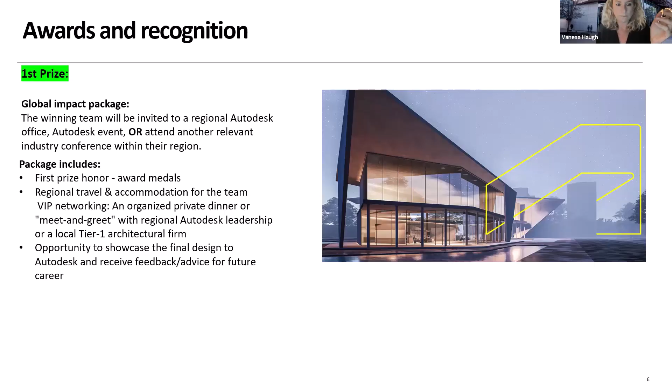In addition to this, there's an Autodesk Certified Professional Exam voucher for each of the team members, a 12-month subscription to Global eTraining platform for each of the team members, as well as a 3Dconnexion SpaceMouse Wireless, one for each of the team members, and some Autodesk merchandise. So there's quite a bit of prizes in there for the winning team. It's an exciting prize, and we're excited about this competition. As I said, it's the first time we have run this on a global level, so this particular prize comes with the value of roughly around $10,000. So it's a substantial prize.

And of course, we have an award for second place. This is an organized virtual mentorship pairing with an industry leader.

So this is the team that comes in second. They will get the opportunity to spend time with an industry expert to talk about their project, present it, and be guided in their career path. In addition, they also receive an Autodesk Certified Professional Exam voucher, a subscription to Global eTraining, and some Autodesk merchandise, approximate value $5,000.

Third prize is an Autodesk Certified exam voucher for each of the team members, a 12-month subscription to Global eTraining, and again some Autodesk merchandise.

But we're not going to stop there. We're going to have some other awards. As the entries come in and Michael and the judging team look through all the different entries, their desire is to extend the prizes out to some other good applicants. So there will be teams handpicked by the Autodesk members in the Buildathon jury, and those winning teams will get a certified professional exam voucher, again a 12-month subscription to Global eTraining, and we do have some more CAD Mouse Pro Wireless left for those. So we have a substantial first prize, second and third prize, and then some wild card awards as well.

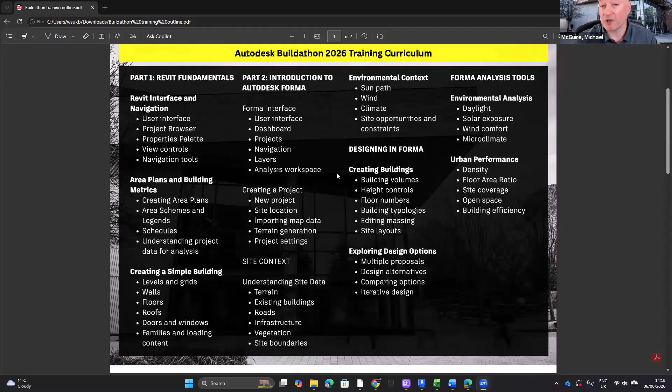Vanesa mentioned a couple of things already that we'll dwell on as we go through. Once you have a concept and an initial design and you've given it some thought, you really want to show how you're using Forma and the outcomes from Forma to influence future designs. So how might you develop or change that concept? We'll have a look at that while we work through the tasks today.

All the way through from concept 1 to a chosen concept, you want to make the job really easy for the judges, the jury panel. You want to show them that you understand the tools within Forma and within Revit, and that you're able to analyse a design, understand the output, and then use that output to say, maybe it is too noisy in this area, there is too much sunlight here, or not enough there. And here is how we adapted and changed the concept.

So maybe concept 1 becomes concept 1.1 or 1.2 - it's a minor tweak, that type of thing. And then from that you may have an entirely different concept. If there are 2, 3 or 4 of you in the team, each of you has the opportunity to come up with your own concept, and then you analyse them and determine which one of the four is the best, and whether you can tweak that even more to improve it further.

But remember what you're going to produce at the end of this - like a poster idea with images, some concepts and some analysis. You want to make the judge's job really easy, to understand what you've done and why you've done it. Okay, so here's pretty much how I was starting this concept.

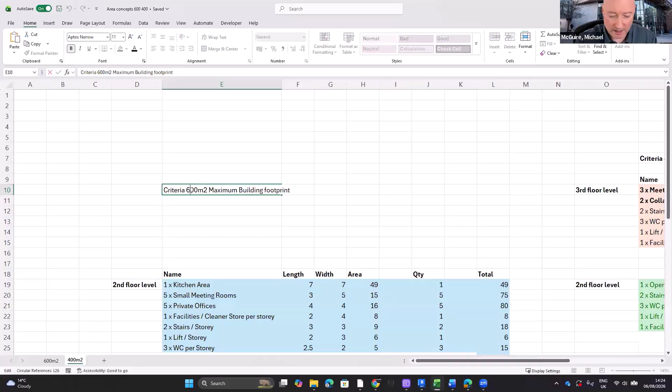So what I would recommend you do is maybe this exercise. This time, instead of 600 square meters, what happens if it's only 400 or 500 square meters, or 1,000? You can practice this multiple times.

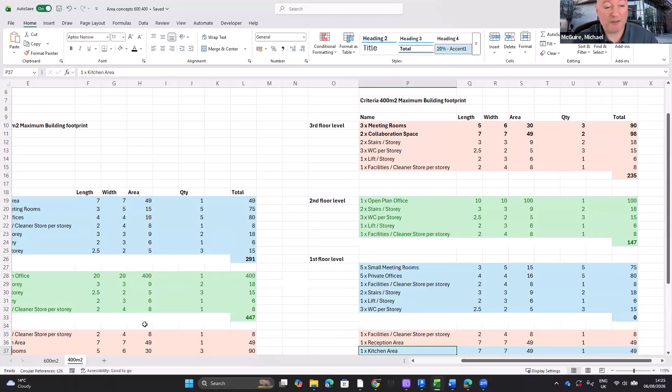This time I took what I already had existing and moved some of the spaces around. You'll notice I've ended up with a base level, then first, second, and third floors. Because I reduced the footprint to 400 square meters, I had to increase the number of floor levels to accommodate that. For example, I had to move the kitchen down from its floor level, and some rooms that were on the ground I moved to a new floor level. So that's just one way of tackling this, one way of maybe beginning or starting.

One question I've had previously: if the building footprint is 600 square meters, why don't I just make this equal 600 square meters? So this would be the next step.

Once you've got that spreadsheet, you want to start trying to sketch out. I did it here as a little sketch, sketching out each of those spaces approximately, maybe something like the right size. But we're going to need circulation space, and it might be surprising to see, but the circulation space on that floor level might be as much as 100 square meters.

So again, something you'll be told is: here's a list of all the rooms you need, here's the number of rooms you need of those—so 1 kitchen, 5 rooms, and so on—and then we'll give you the area, the largest or smallest those rooms might be. That doesn't always include circulation space. So if we also tell you circulation space needs to be a certain width, 1800 millimeters or 2400 millimeters or 2 meters, whatever it might be, we'll give you a specification of what width that needs to be. What you can't do is make any of the spaces bigger or smaller than what you're allowed in the schedule—you'll have a minimum and a maximum.

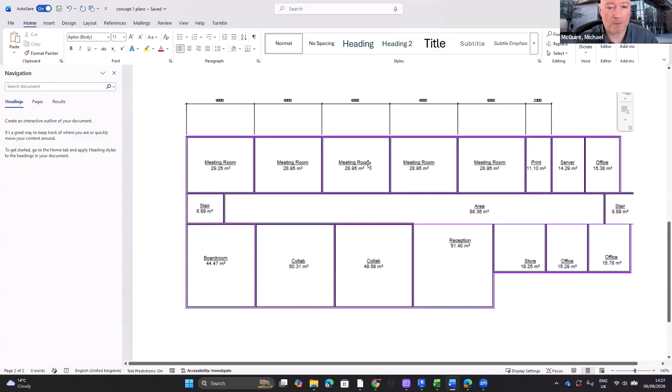And what you can't have is, imagine on the bottom right, the southeast space—if that's just an empty room, none of the spaces assigned, you can't add new spaces to the list. You need to use all the available space and no more. So if this was my original concept sketch, once I start to put the spaces together, it has to change shape because the store had a maximum size, the office has a maximum size, and so on. I got to this point using the spreadsheet and then the sketch.

The next step for me would be to go and create a little simple model within Revit. So what I thought I'd do first is show you that next step before I rewind a little bit. I'll go back a few steps to the beginning of the Revit project and recreate something like this, and since it's being recorded, you get to see those steps.

For anybody who's brand new to Revit, this might be a little boring watching how to begin and create new levels and how to draw walls and use dimensions. But ideally, if you've never used Revit before, this should give you enough knowledge and skills to recreate something like this.

Within Revit, we have the project browser here. As I said, this is one I've created previously, but let's go in and change some of the settings back—I had these little sketch lines switched on, I'll switch that back off just now.

There we go, nice neat lines. I've created the meeting spaces to the size they might need to be, the print room, the server, the office. It asked for 2 staircases, which I've tried to position at the west and east of the building—the office, stores, reception, collaboration space, boardroom, and so on.

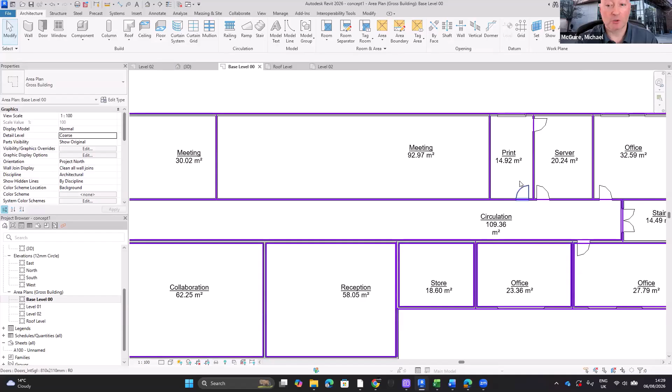Each of these spaces must be within the tolerance that's in the brief. One of the things you'll have to communicate is an area plan for every concept to the judges, and they'll check that your areas are appropriate and correct size. So here, the meeting rooms are supposed to be maximum 30 meters squared, but this one is 92 meters squared. So there's something wrong here that would need to be addressed before I could use this as a concept.

If we create the footprint of the building, if it was 600 square meters that I was allowed as a building footprint, the footprint of my building is within that 600 square meters, let's say. So we can see that as an area as well.

What we would want to do is take these images of these and the area plans, etc., along with the Forma site design analysis, and then communicate that in the best way you can to the judges.

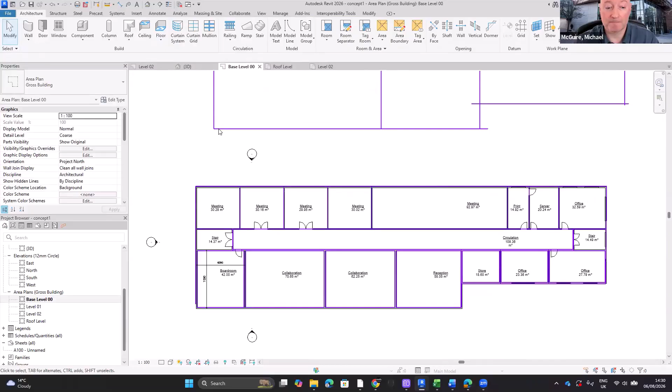Even with things like the building, if we want to think about a nice aesthetic angle, what materials are there - for me it always looks pretty good presented with just these white walls, versus, let's see, what does it look like if we pick up a different type of wall, like this one? You might think that looks more aesthetic, or you might think the other wall system looks more aesthetic. There's no right or wrong answer - you just got to make that judgment based on your team's preference.

I will close these down - I don't need to save that. And I just want to remind you that if this was the first step, I would like to now try and recreate this building.

So on the base level are all of these rooms to these sizes. I need to try and figure out a way of putting them together. So the facilities and cleaner cupboard, would that be in the reception? Where would the reception be to the building? Would the meeting rooms be near the reception? Would the print room, the IT server, the storage room and the cleaning store all be together? Is there a reason I would put them together?

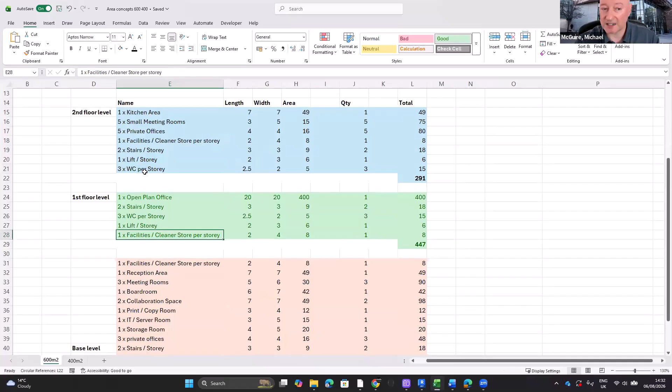Obviously, things like the stairs - the stairs are going to go through all of the stories. Do we have a staircase that goes from the ground all the way up to the second floor? Do you have a stair that goes to the first, and then a different stair that goes up to the second? So entirely your decision as a team, but remember to try and justify why that's going to happen.

So the next thing - just to show you, if I had that, I'm going to try and attempt to recreate this sketch that I had, and it ends up something like this. So if I put it like that, I'm going to move that onto a different monitor so I can copy my sketch idea.

And then we can start our Revit project. So from Revit, I'm just going to click on New, and we'll take the default architectural template and click OK.

So the first thing to note within Revit is that we have this bird's eye view, so we're looking straight down. Currently there is no building here, but this would be my north elevation, my south, east, and west. This little arrow here - if we go to the project browser and expand the elevations, there is the north view. And if we open the north view, there is nothing here to look at yet, but it would look from here in this direction. That's what that is for, that's what it's showing you.

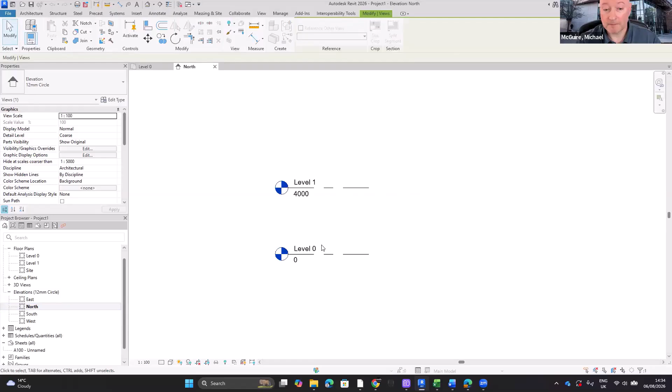If I was to open the north view, there is no building there, but we have the different levels. So I'll make this the same as what's in my spreadsheet. If I said base level, I'm going to be asked if I would like to rename these views - currently it is level 0. If I said yes, it renames this view the base level. We also have level 1 - what did we call it in the spreadsheet? First floor level, so let's try that. All I was doing was clicking on it once, it goes blue, and if I click on it again, I can edit it.

So first floor level, and then hopefully you understand now that if I said yes to this, I now have a base level and a first floor level. But if I go back to my spreadsheet, I also need a second floor level as well. So by default, Revit is only going to give me these two.

We should also notice that it is blue and white, which tells me that a corresponding view in the floor plans exists. So we have base level and first floor level. They are parametric. So if I double click this here, or double click here, then it opens that view in a bird's eye view. And to go back, I can go back to one of the other views in elevation and just double click that.

So maybe at this point you might want to discuss with your team what the different story heights are. So maybe it's 4 meters, maybe it's less. If we again just click on it, you can see it goes blue. So if I click on the 4,000, that's the part that I can edit. So if I said 3,000, then it moves the level down to 3,000. If I say 4,000, it's back to 4,000.

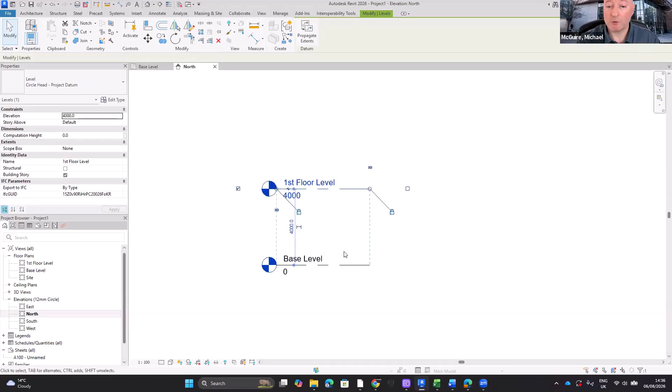So this base level, if you walk into the building, this is what you would be walking on. You imagine the floor would go down deeper than that. So this is the level you would be walking on. And if you go up through the stairs and you step into the first floor level, then again the floor and the ceiling and everything comes down here as well. So we want to think that's 4 meters. So it's not floor to ceiling height, it's floor level up to floor level.

And I need to add another here, so we would like to add the second floor level. So what you'll notice is on the ribbon we have the architecture tab. And in the architecture tab we have lots of the build tools for walls, windows, doors, etc. Floors in here, curtain systems, stairs, and so on.

We also have along here the level button. So if I click on architecture tab, datum panel, click level, the level tool is active. So it's asking and prompting that I can go and click to begin. And if I hit escape twice just to show you, my cursor is normally the Modify tool like this here. But as soon as I click on level, the Modify tool goes away and I get a little crosshair there.

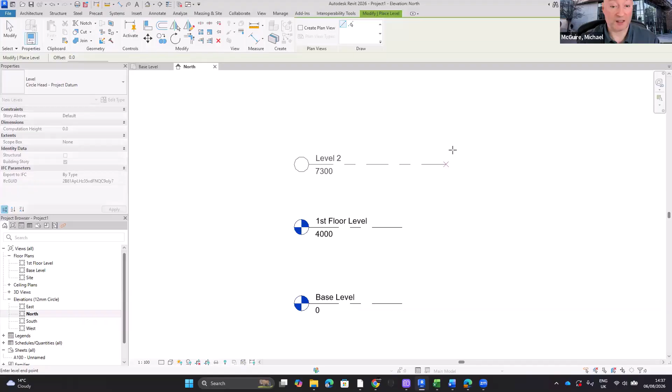So anywhere at all, if we think about it around about here, if I move my cursor, a green dashed extension appears. And what that's allowing me to do is click in this area to begin drawing the next level. And if I move to here, we can see that green dash again, and I can click to drop that or stop creating it. But something to notice with Revit, you've always got to keep an eye on the cursor - it's trying to draw more levels. So I don't want to draw any more, I only want to draw the one.

So if you press escape twice, the first escape in Revit stops drawing anything you've created, but it doesn't end the command. So the second escape is what actually ends the command. Always hit escape twice. If you want to hit it 3 or 4 times, that's also fine, just to make sure - it makes no difference if you hit it more than twice.

Hopefully you're being quite observant and you'll notice that this level is not blue and white. So again, we want to make that blue and white so that we can see it here. So anytime you create a new level, you have to go to the View tab. On the Create panel, you'll see Plan Views, and I want to create a new floor plan view.

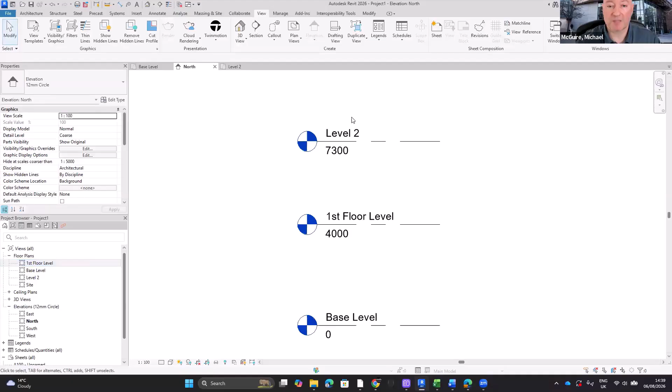And this is what pops up - it says Level 2, I'll accept that for now. And by clicking OK, we get a new level here. And if I go back to the elevation, it's now blue and white. The reason you want that blue and white is so that you can actually draw your walls, windows, doors, floors, etc. on those levels. And then finally, let's change the height - we'll say 8,000. So using the same as we did before, clicking on it once, click on it a second time.

There we go, so second floor level. Would you like to rename this corresponding view? If I said no, this here would be called second floor level, but in the project browser it would still be called level 2. So we have to say yes.

That is us set up, ready to go. So if I just do a little quick demonstration, we'll come back to this in a bit. If I go in and draw some walls just now, step by step, don't worry - there's the ground floor level, so the base level. If I go to first floor level and create some walls, I'll draw something a little bit smaller. There we would have that.

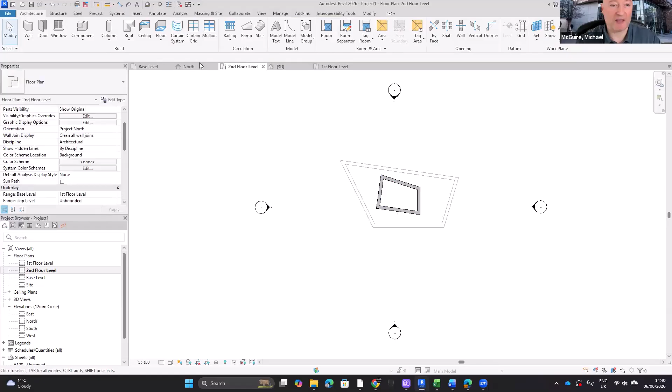And if we go to the second floor level, if we had another level, we would want to go in and switch that on. We can go in and switch it on here so that we can see it, and then we'll be able to draw our walls for the next level, if there was another one, if we needed to go to 3 stories for example. So if I take these away...

You should be able to get to that point then. So you would create your 3 levels or 4 levels or 5 levels, whatever it is that you need to do for your concept and your design.

So the next step is, if we had to go to the base level, we can then draw in or sketch those walls in a rough area where they might be sitting - think of this like a sketch. From my spreadsheet, we know all of the rooms and the approximate sizes of those rooms. And from my sketch, I know roughly where those rooms are going to sit. So something like this.

So if I want to try and recreate something like that, we don't need to draw it within here because it's going to be quite a big building, and these are just going to get slightly in the way of this. So what we can do is draw out here - it's like an infinite piece of paper, an infinite space. If we start to draw in here, we're going to end up needing to move this little elevation marker so that it sits on the outside of the building as well.

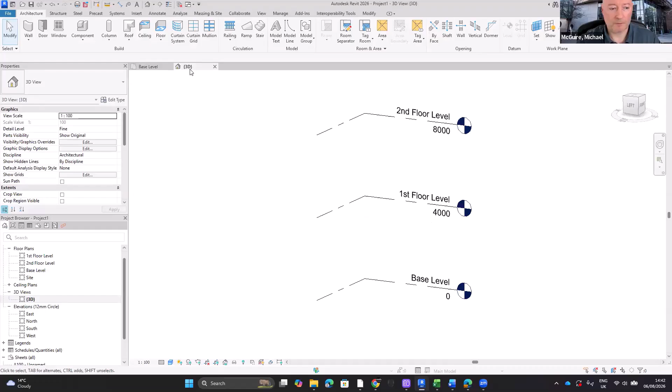If I double click 3D, then I can see the 3D view that's here. If I double click base level in the floor plan view, you can see here on the tab it's calling it the base level - it's obviously a floor plan, like a bird's eye view looking straight down, and it is the base level. So we're on the ground floor, the base level for us to begin drawing the walls, let's say.

So on the architecture tab, on the build panel, you have the option here, which is wall. If I click that tool, it activates the wall command. We can also see the cursor changed from the modify cursor, and it's now a little crosshair. You will also have here in the properties, you can go in and edit the properties of the wall, anything you're creating or anything that you select. Or here in the type selector, if you click that, you will see there are many different types of wall that you can choose to use.

Just as a little example, some of these are brick on the outside and then plasterboard on the inside, with all of the different framing materials, cavity, blockwork in between. For this, we don't need that level of detail - you're welcome to use any that you wish. Personally, I'm just going to go and use one of the little partition walls, so like an internal partition wall. So I'll just use this wall that's here.

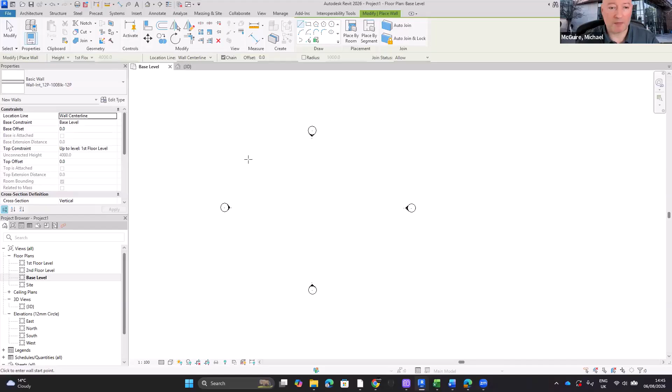I already know that maybe I want to draw for something like 20 meters or so. When you click to begin, you'll notice the wall is like a little rubber band. You can point in the direction you want to draw, and then type in the size, like 20,000 - for me this is in millimeters, so that's 20 meters, or 30 meters, or however long it's going to be. As this is going to be like a sketch, you can also just drag it out as far as you want and click to drop it there.

Let's come down so we can see - now it's asking in which direction do you want to draw. We can come down in this direction and click again, maybe here, and then go back into this direction here. You'll notice when I have my mouse directly underneath the start point, that little green dashed extension appears again, so I'm going to look for that before I click my mouse.

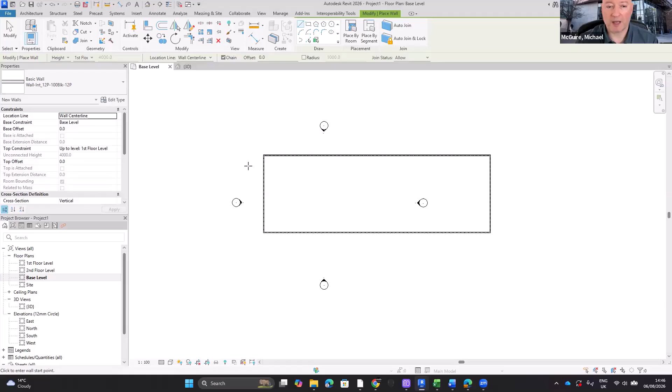To finish - a lot of the different processes in the Autodesk tools are very similar, and you'll see this when you go to FormIt as well. If you go back to point 1 and click, it closes the shape and finishes it. So a tip - we get tips and tricks as we go through. I'm going to press Escape twice, and if we go to 3D, we can check at this point that there are no problems. That's a great tip to have early on.

What you don't want to do is - I'll show you something like this. There's a problem, okay. Let me pick up the brick wall to show you - there is a problem here, this wall at the back is way too high. Ideally you want to spot that really early so you don't carry on and make lots of detail and changes and everything, and then find it later.

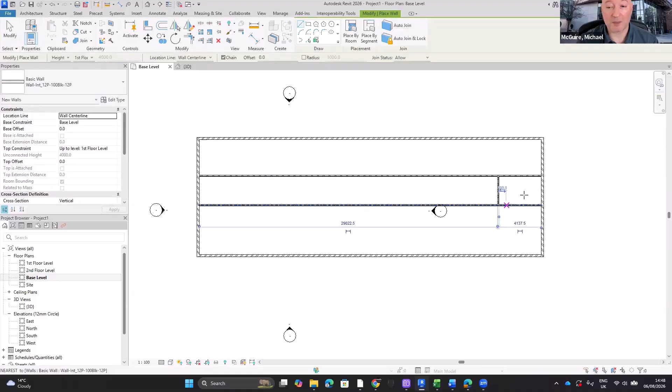I'm just going to set that back so it isn't a problem. If I go back to base level, my initial trial, then go back to wall, all I'm going to try and do is recreate the sketch. If I click to start the wall somewhere and then click to end it somewhere - I know this is circulation space in here, because of my sketch there's a staircase here and there's a staircase here, and then a series of rooms along the top. If there was a room here, how do you propose we would get into that room? We need the staircase here so we can have a door into this space.

If I just recreate these spaces - I had something like 1, 2, 3, 4, 5 meeting rooms in my sketch, then a print room, a server room, and an office. Again, how would we get into this office? Ideally, I'm just going to drag that for now because I'm kind of just sketching at this point, and I'll fix all the room sizes with dimensions before we make areas of them.

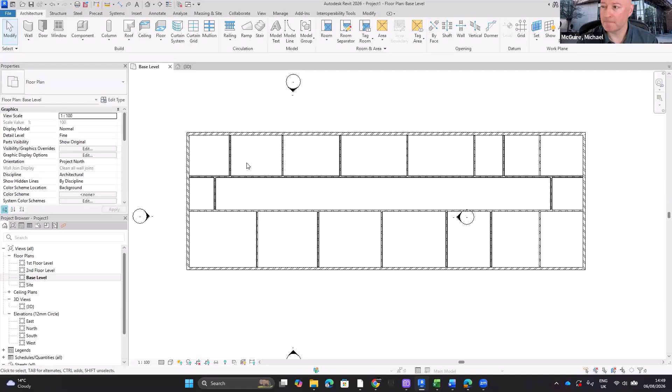I'll go back to wall - I know I had a room here that was the boardroom, then a collaboration space and another collaboration space. This was maybe going to be my reception area here, then a storeroom, an office, and another office. So as per my sketch, this is how I think this would work - I knew approximate sizes.

So once you have all of your walls in, the next step, going back to 3D, is to double check that everything looks okay - again, checking that nothing looks like that problem before. If there's no issues, as a sketch, although it's a 3D model, it's still just a rough sketch in my head - it's a concept. It looks something like this sketch that I created.

I now want to check the sizes of the rooms and make them fit. If we had a store, that store was allowed to be 8 meters. I'm thinking something like 2 by 4. There are other ways to achieve 8 meters, but I'm thinking 2 by 4 might work.

The reception is around 49 square meters. It can be smaller than that, and if you check the brief, maybe it's allowed to be as small as 40 square meters. But I'm going to try and make it as big as I can, so I'll try to get it as close to 49 as possible.

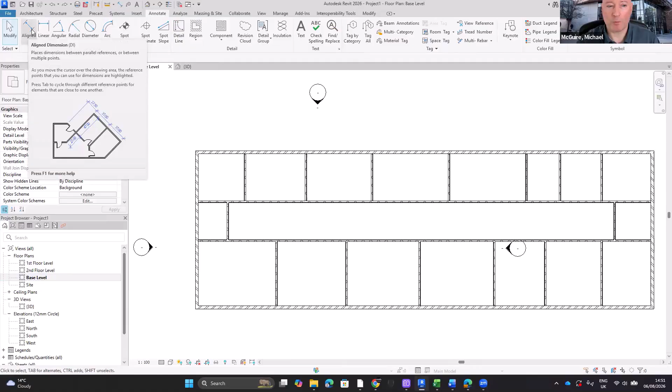What we need to do then is go up to the Annotate tab, and I'm going to use the Dimension panel with the Aligned Dimension tool. We can start to add dimensions, and there are different ways to do it. You'll notice there's a dimension that goes from the center of the wall to the center of the wall. We're not going to be super critical about this - if these are the area sizes and it's to the middle of the wall, that will be allowed. There are other ways to do it where you can dimension to the wall face.

So if we add it to the wall face, we could do that as well. If it was me tackling this, thinking of it like the Buildathon, I'm going to try and go from the middle of the wall to the middle of the wall. You can see that approximate size - that was one of the meeting rooms. I think the meeting rooms should be around 5 meters by 6 meters, so that's quite small at this point.

While you add the dimensions, this is why I would maybe try middle to middle. Notice if I click for my first click and then my second click is the first wall and the second wall, I can then click a third time to drop the dimension. Or I can continue clicking and it will select the next wall and the next wall and the next wall. Then if I click here in this space, it drops all the dimensions at once.

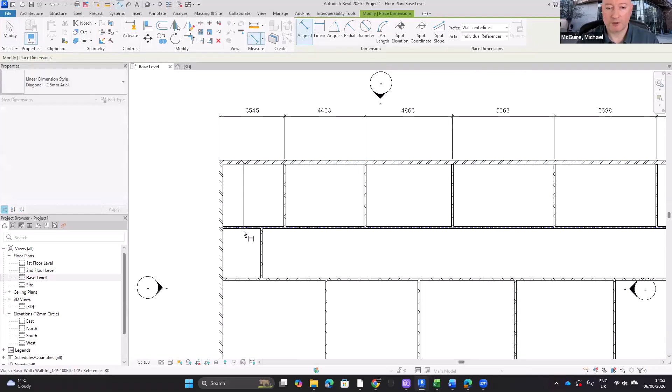So there's those dimensions. If I did it the other way as well, just to remind you, we'll do Aligned Dimension from the center of this wall to this wall here, then select the next wall and the next one again. Then if I click the mouse, it drops the dimension, and then escape twice just to drop that tool.

As an educator, I'd say the number one thing that catches a lot of students out is changing these dimensions. If you want that to say 5 meters, this is 9 times out of 10 - I'll show you what students do wrong first. They will double click that value and this pops up. This is the wrong way to do it.

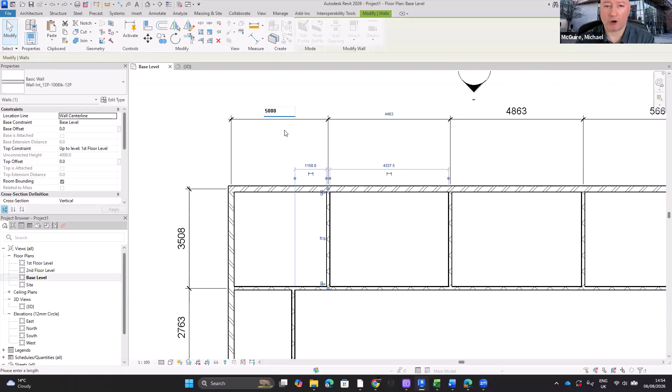What Revit is asking you is, what do you want to move in order to change that dimension? We can move two things - these two walls. After hitting escape twice, I have the modify tool active, you see that with the cursor. If I click this wall, the dimension here turns blue, meaning it's editable. So if I say 5,000 and press return, that space is now 5,000 - between the center of this wall and the center of this wall.

Okay, we'll do the next one. Be careful - you'll notice it's 3508, but when I select it, a little temporary dimension pops up that's measuring from face to face. That's not what I want. I want to change this one up here. So 5,000. Then I'm going to work my way along from this wall, doing each in turn all the way along. 5,000, and then the next one, again this dimension, 5,000. So we have 1, 2, 3, 4. I have one more to do. 1, 2, 3, 4, yep, 5 meeting rooms.

These other spaces, we're going to do exactly the same thing, but now we have the print room. The print room was something like 3 meters, so if I click this wall here, I can change the dimension at the top to 3000.

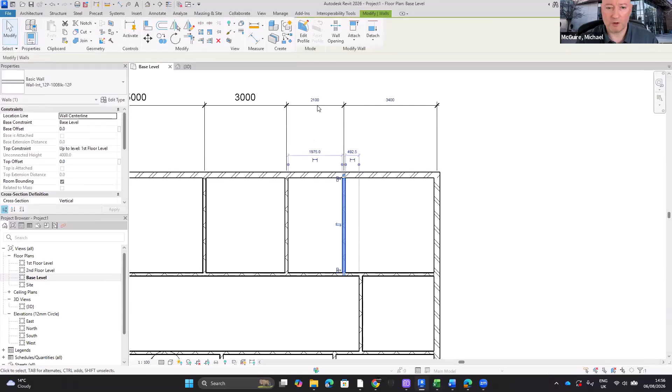The next one is the server and then the office. What I might find is when I make the size the server, it might end up being too big, so we'll see how that works. What size should the server be? Oh, 3 meters as well. So if we click this wall and make that dimension 3 meters, there we go. That means for this office space, this is the last wall to move.

So we had storage room, 5 meeting rooms, 2 here, whatever it might be. Let's say it's meant to be 5 meters. So if I take that from the brief, we now have 5, 5, 5, 5, 5, 3, 3, 5 meters. So we have all the rooms the correct length.

What we need to work out now is what the width of these spaces should be. Those meeting rooms should be 5 by 6. So I've got 5 meters, and this distance here needs to be 6 meters. Do you see what happened to the corridor? It made the corridor only 270 millimeters.

So we need to change the next wall. Maybe we're told it's 1800, whatever it might be on the brief, 1800 or 2400 or whatever it needs to be. So these rooms here have all started to become the correct area.

So we've got these hopefully now the right size, 5 meters by 6 meters, and that should tie in with what we've got for these rooms here. I've only got 3 here, but let's say we were asking for 5. I think in my initial brief I changed it myself to 5. Now we've got the 5 of them plus a print room and so on.

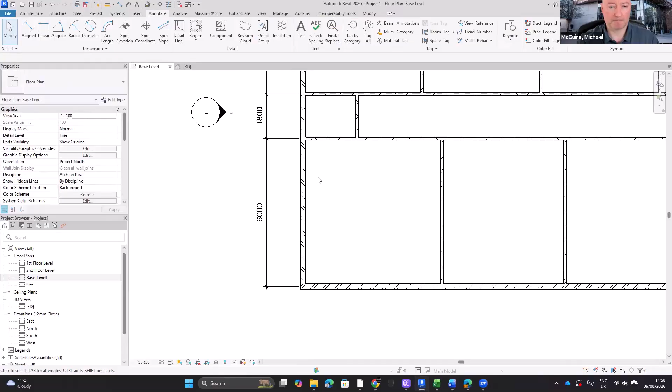I can't use the little temporary dimensions because they go to the walls that are here, to the face, and to the ones in between. I need to know the width of the room. So I'll go back to the same dimension tool: annotate, dimension, aligned. I'll pick up from the middle to the middle and carry on all the way along to the middle of each of these spaces, then click to drop that dimension. Then we do exactly the same thing I did before.

I'm now going to work my way along, starting with this wall. We said the boardroom should be 6 meters by 7 meters, so this dimension here should be 7,000. So this is now the boardroom here.

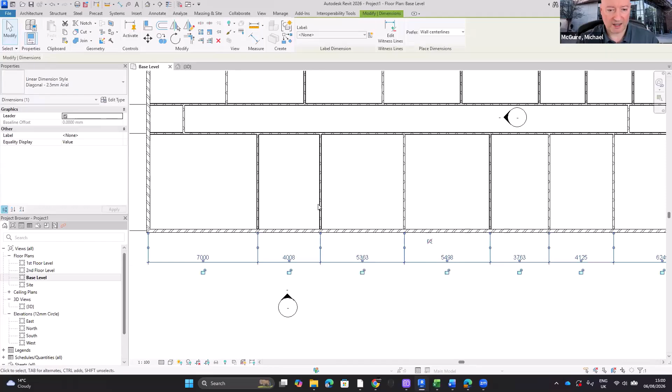Then there's a collaboration space and another collaboration space, and then the reception. The collaboration space should be 7 by 7. Well, I've got 6 meters deep, so let's try 7 just now. It's slightly small, and then again this one is 7. We could do 7.5, so maybe 7,500 if we wanted more space for it. Then we're just working along.

So if this wall is in the correct place, and this wall is in the correct place - here's the number 2 thing that a lot of students get wrong in Revit. The first one was changing these. The second most common mistake I see students make is if they want to change this size here.

So we want this to be a reception, for example. I'm going to move these out of the way so they're not interfering and we can see. But I want to move this wall to make this space the size of the reception - reception is 7 meters by 7 meters. Again, this is only 6,000 deep, so maybe we want something like 7 or 7.5. What a lot of students do by mistake is they click this wall - so let's make it 7,500.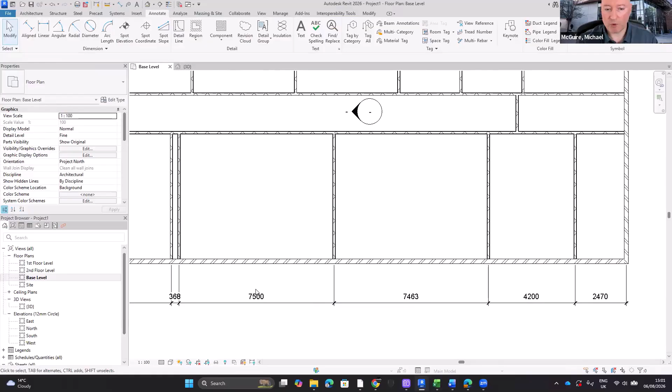And you see that wall moved and it is 7,500. But what that did was it changed the size of the room that we already had, the collaboration space. So this room here is correct. So if I move this wall that way, it changes that room.

So I'm going to click this one and make it 7,000 again. So there's my reception area, and then the next room is going to be a storeroom, whatever that might need to be for size. So we had, which one was it? Even if it's a plant room, 5 by 8, staircases, we'll check the size of them. So a cleaner store, or whatever it might be.

Let's say it's meant to only be 2,400, but it's way too deep. So what we might have to do, and we'll see this throughout our design, is if this is too deep and these rooms here have to be narrower, not as deep. We can't use more space than the brief says we're allowed to. So if this space is going to be too big, then we need to change the shape of it.

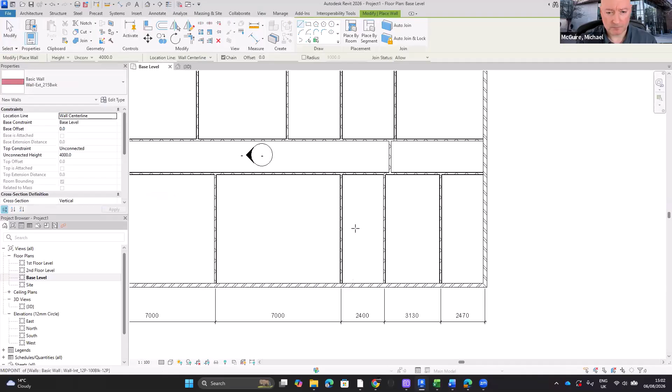So again, I'll just use wall. You can continue using the same wall type that you already used. And I'll just draw along here. And it means this is correct as a space, but we don't actually want these ones.

So what you'll find is you can click on these walls and just change the length of them. If I click on the wall, the little blue dot that's there, and if I click on that wall, that little blue dot, and do the same with this one, I have a little bit of wall that I need to add in here.

Okay, so then these end up being the size that they need to be, but look what that's done to my building—the building shape has changed.

Finally, the next step within here, if you think that's correct, is to prove that you've used all of the areas and you haven't increased any of these sizes.

So how you do that within Revit is, if we look on the Architecture tab, on the Room and Area panel, the first time you run this, if you drop down the Area button, you have the area plan available, but you'll notice that the area tool is grayed out—it's currently not available. So we'll click Area Plan.

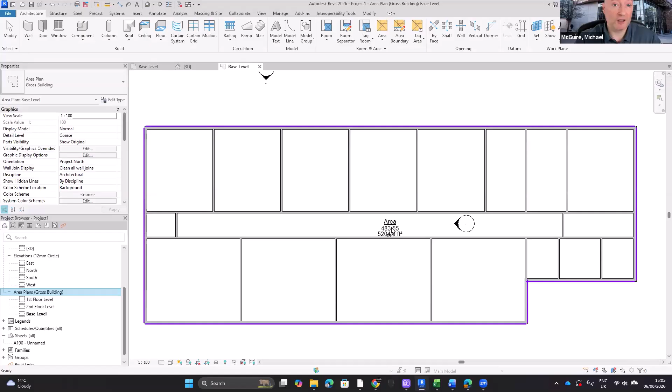So that's good if we have a 500 square meter building footprint maximum. If your limit is 400, then it's too big—450 is too big, 500, yep, that works fine. So the building footprint currently is 483.5 square meters.

If you want to work in square meters or square feet, you can select that little piece of text, and up here you can determine which one you want to use. For me, it's just square meters, so I'll use that.

Each of these rooms, I would like to put an area or a space in it to tell me the size. Now, if I tried to do that just now, you'll find that is all one area. What I need to do is use all of these to divide the areas, so we need to tell Revit that these are walls and they're going to divide each of the areas.

On the Architecture tab, Room and Area panel, you'll notice there is a tool called Room Separator and then Area Boundary. At this point, we want to use Area Boundary. If I click that, it's set up to pick something. Now you can draw these in—you could draw a little rectangle, or a circle, if you've got a room that's a circle. But it's set up currently.

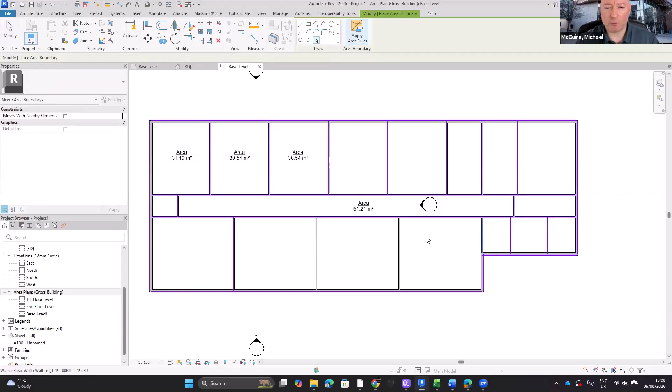So the process is area boundary, click each of the walls. You want to make sure you pick each of the walls only once. There we go, so all of the external and all of the internal have been selected. And then we pick area, and as we go, you'll notice it's filling a colour into each of the area, so you know if you miss one.

So let's say, for example, I wanted to do this, and I wasn't going to use this space for any area. Then in my concept, I need to change the exterior wall because I can't have an empty area or an empty space. I can't have any space that's not used.

Okay, so we've got now all of the footprint, everything's all covered, so we have those areas. And it's 31 square meters, or it's measuring to the outside of the wall. We could draw that in and bring in more detail, but that will be absolutely fine. So we've got all of these spaces now at approximately 30 meters for each of the rooms.

I want to now change what it's called. Okay, so again, like the elevation, if you click once on it and then you click again, I'm going to call this one meeting room. And then the same again here, I'm just going to use copy and paste, so all of the meeting rooms then are called meeting room.

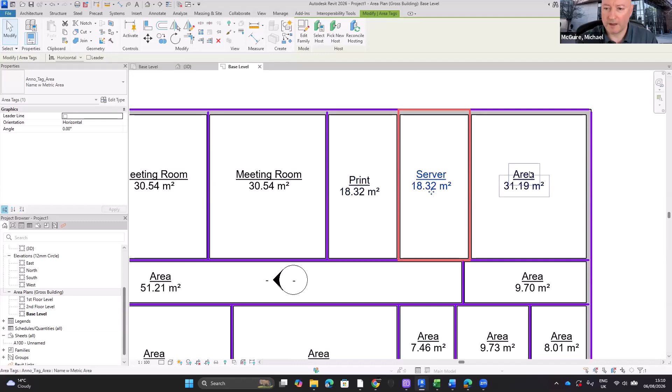That's not meeting room, that should be the print room. And then this should be the server. And then this one here was an office. And again, I want to pay attention down here at some point to how you get into that. And maybe this wall should have been moved further over.

And we can see what happens when I move the wall. It's changing the area. How is the area of that in comparison to the spreadsheet? Is it too much? Is it too small? Okay, and then just paying attention to each of these areas and these space sizes, so meters squared, square foot, whatever it might be. If you get to this point and you have to move some of the walls because the areas are too big, that's why you're achieving this, that's why you're doing this step.

Okay, so if this wall here needs to move to the left, you can go back to your base level view and you can change these dimensions. Okay, so if we said 4,500, and if I go back to the base level on the area plan, you'll see everything moved and everything changed in size.

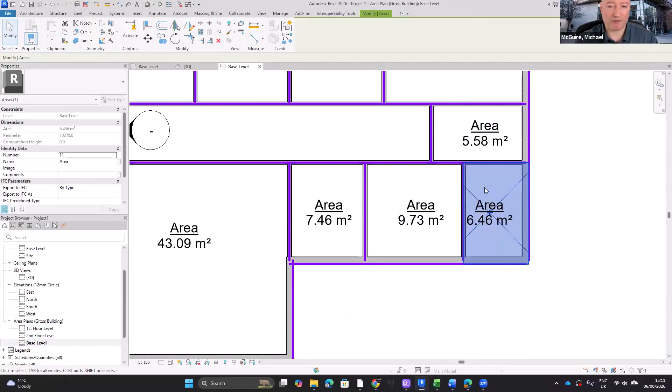Okay, oh, I do notice something. How would I get in this space? Okay, so I have to go in the stairs to get in, or do I access through here? Maybe I go into the office to then access this office. Maybe does it work if the wall is over here? Not enough. Okay, so one thing to think on when you get to this step is what your fine tweaks might be. What rooms do you need to change, for example?

One of the things that I ended up doing with my concept, if this is the boardroom, this one here is a collaboration space, like a big open plan collaboration space. I should have copied and pasted. And then this is the reception, okay? One of the things we could do is we could utilize this space here.

So we've got something like 50 square meters. If we made that wider and it was 2,400 millimeters, maybe it would end up closer to almost 100 square meters of space. If you're trying to reduce unused space, then maybe you want to bring the reception area up into here as well, so it's not all just this space here.

Okay, and again, just checking in 3D that looks okay.

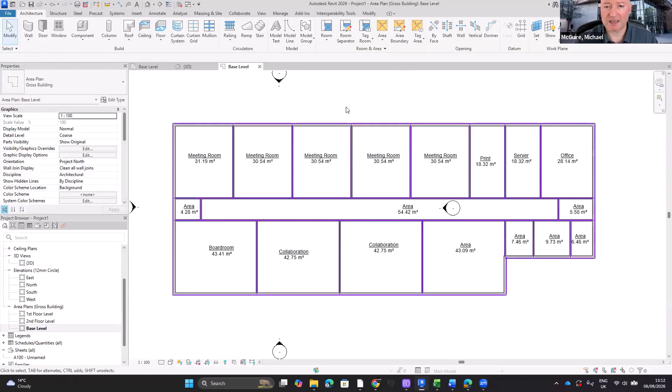Finally, the last thing to do in the area plan for this level is look at the Annotate tab. In the Colour Fill panel, there's a tool called the Colour Fill Legend. If I click that and drop it, it asks what scheme you want. Is this the area, the gross building? You can just accept that.

So currently it's showing you a legend by the type of the area. What you can do is click on it, and when you click something in Revit, the Modify panel appears. So we can click Edit Scheme.

Rather than by type, we want to divide it and show it by room name, or area name. This is just a default, it's saying I'm going to set all the colors for you. If you say okay to that, and okay again, you get all of the colors appearing for you.

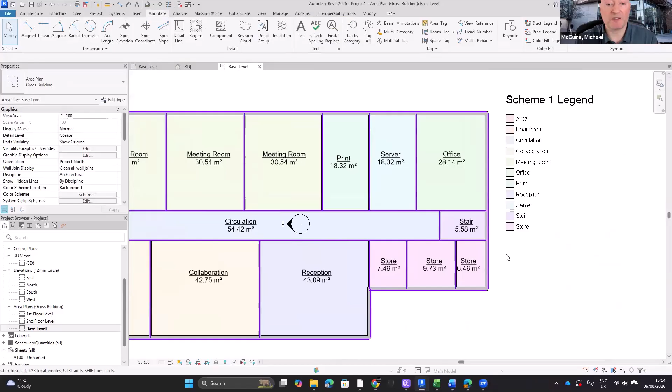So we can see right now we've got area a lot. If I say circulation, it adds circulation into here. This one here should be reception. Nothing should be called area, right? So if we said this is stair, maybe this is stair 1, stair 2. There's a store and another store and an office or another store, whatever it might be from my brief and schedule that's there. So you've got one more that's called area.

This works really well in that you can screen print this. So if we take a screen print of this area here, we can use that on our poster to show where we initially thought the reception would go.

Possibly that happened because there's a road here. If there's a road here and it's very noisy, is the meeting room in a good position? What about the boardroom? It's going to get a lot of sun in the afternoon and evening. The reception, where is the car park? Where's the main road? What is the entrance to it? Why did you think the reception would be good here? What about putting the staircases at both ends? Why did you think that was a good idea to do that?

One thing that's a little warning: when we look at the ground floor, we've pretty much used up like 500 square meters or so, almost 500 of a 600 square meter footprint, for example. So we've used up as much as we can. The next level up is going to be smaller than that, and the next one up is even smaller. How is that going to affect where your staircases go?

So if your building is getting smaller as it goes up, is it getting smaller like this? It's only using up, let's open up here, the base level. So is it only going to utilize these spaces here? In which case, how do you then get 2 staircases on each level?

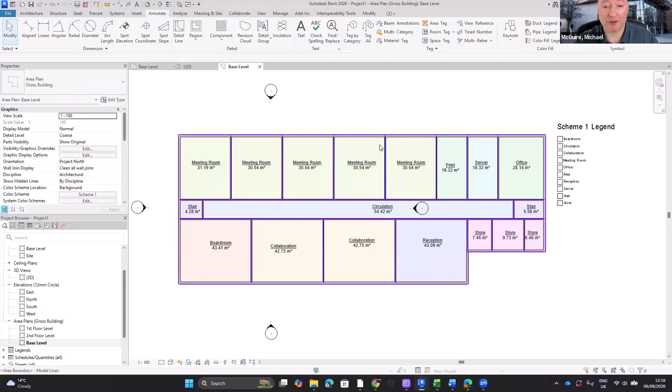Okay, so you might then think of a different concept. I need to put a staircase maybe here. So maybe a staircase goes here, and on the ground floor the meeting room goes here, and I have my second staircase in this area here. So on the next level up, it's just a repetition of exactly what we've done. So this is the base level.

To do the same thing on the first floor level, you just repeat all the steps. You open the first floor level, go to the wall tool, choose the wall you want, and begin drawing those walls in. So if you think, I will try and make it a little bit smaller this time.

So if I know that in my concept... I've just roughly done that, but in my concept, if the upper level is less square meters, hopefully you can see there's an issue. If this was the staircase, it goes to the roof, right? It goes nowhere. So that won't work if we want to do that. Okay, so maybe we think about in the concept putting the staircase here. And then in the next level up, if I was doing like a 3-story building, it's even smaller again.

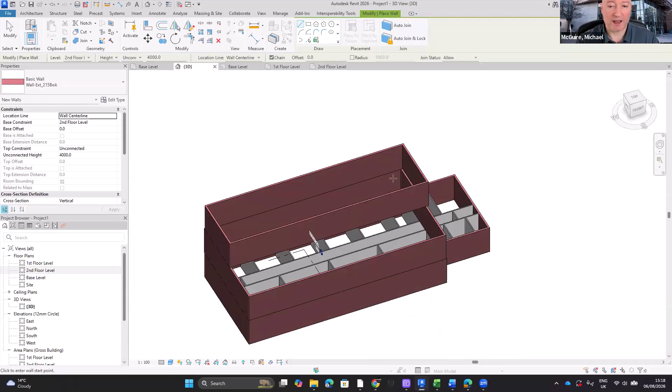Okay, that's why I'm thinking maybe that corner's a good place for the staircase to go. So if we're repeating the same things again, we've got all the internal walls to put in, then the areas to put in. We then have that upper level in that corner. Not only the stairs, but can you also remember what else we want to stack? Any wet rooms or bathrooms?

So where were the bathrooms going? Okay, so if we think about that here, maybe I was putting the bathrooms here, right? One here and maybe one over this side, or wherever it might go. If we put a bathroom here, do we put the bathrooms here? So they're all together, so they're near the reception. But if my building then gets smaller...

And the bathrooms were here, how does that work then? Where do the bathrooms go now? So if we put the bathrooms here, then where does the staircase go? So do think about that vertical articulation, how you're going to move between the different levels.

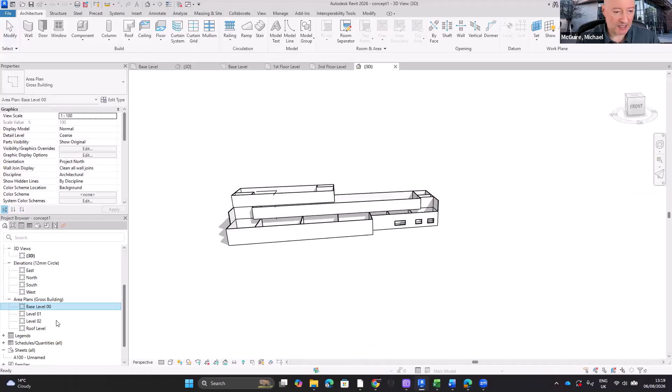Okay? So that's the plan. Ideally, what you would have then is, if we go to that little concept that was there, it's quite similar. You'll notice it's very similar in what's being created. So we can say there's the base level. Okay, there's what that looks like. We go to level 1, then we would repeat that for level 1.

Maybe there's a big open plan. What did we have? An open plan 400 square meters office, plus 2 staircases, 3 WC, the lift and a store. Okay, so we start to put areas in here as well. So we think about the area boundary and what we need to add in there. So for area, we've put in 3 WC and a store and 2 staircases, a lift, whatever that might be.

Okay, and then carry that on upstairs. So you will end up with 3 different stories, or 4 stories, or 2, however it works for your brief. And each of the plans will have all of the different areas. Here we go, showing all the rooms have been used and showing that they're not bigger than the brief facilitates. Okay, so I would say that's a good point to pause.

I would ask at this point if anybody has any questions. This might be a good point to ask them. I do see Q&A. There is, Michael.

Yes, I think I might reply to one from Kevin, and I might just run that question by you as well. We asked if the location of the project, country, city, or district will be provided by Autodesk, or will the teams be free to define it themselves? So I have said that the location won't be given, that each team is free to choose their own site. It can be a site on their own campus or any sort of local site.

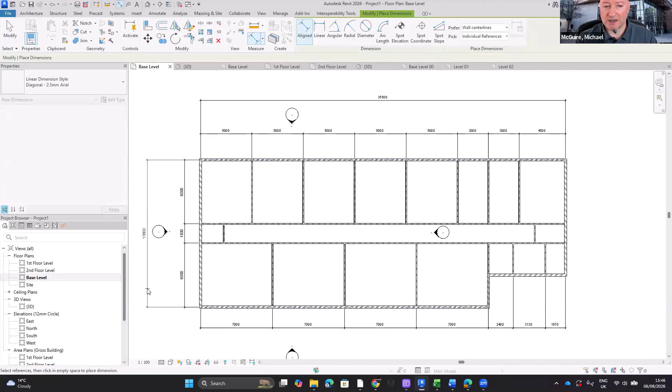I'm just going to add on the annotate aligned dimension again - actually just going to add the overall, like the overarching length of that. So you'll notice here I'm picking up the first and second click for the dimensions of the exterior walls. And then maybe I want to know this length here, this in here.

And finally this part, I think we know—we should be able to infer from this anyway. So once I take note of what these dimensions might be, from a recording or screen print, I'll note them down and try to recreate them here, and figure out what the second level might look like. So it might look something like this. We can see them here—there's that next level up, and then the third level that's here.

Okay, so I want to try and remake that in Forma site design. So if we go to the Forma hub, go to this site for Forma site design, we click to start a new site design project and create a new project. What would you like to call it? Let's call this Training 2, and create that.

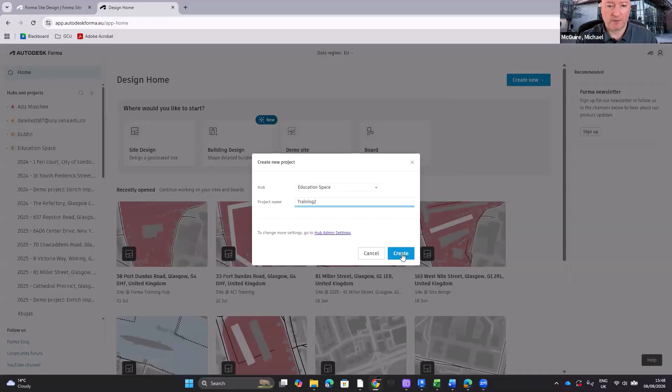So somebody asked, will you be given a site? And you won't. What I would like to do in this case is use a site that I know, so I'm going to zoom in and go find that.

If you're using too large or too great of a site, you'll notice here—zoom in to select your geolocation. So if I zoom in, I can go and find that site. I'm going to find a site relatively close to me. Let's go and find that in this area where it might be. Yep, we can start to find that around here.

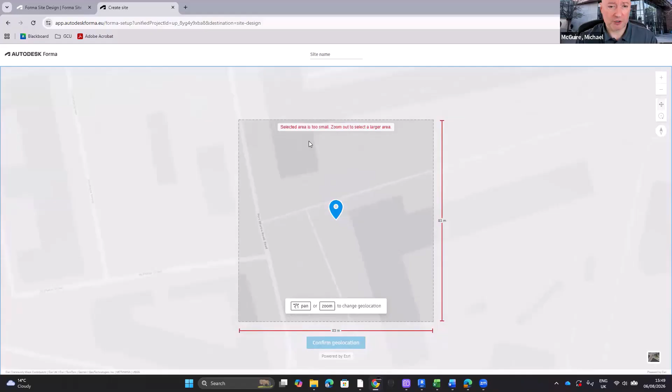So something around this site area here—I know the site, it's an area I'd like to work and develop on. If you zoom in too much, you'll see the selected area is too small, so if you zoom back a little, you have a window in between that it likes, a size in between the two. Once you see the Confirm geolocation, you know you've zoomed in enough and not too much.

I'd like to not be zoomed in too much so that I can see some of the existing buildings and take them into my analysis as well. So once you've found your site, we say confirm the geolocation, and this will take just a few minutes to build.

Once it finds the site, there we go—it will access that for us and give us some options of what we want to do to build it. So these little libraries that we have available, we have one called the starter pack, and it's going to add the roads and the buildings, etc. If we look at add, it says it's going to add the Overture buildings and the Overture roads to this site.

Okay, so we can look at where that needs to be—it's going to be this area here. I know I've got buildings all around it, so we can say add to that. That's going to add all that information. It says it's placing an order—it's free, it doesn't cost you. We can close these down. We don't now need to add the Overture buildings because this did it, and the Overture roads as well—both have been added by adding that one starter pack.

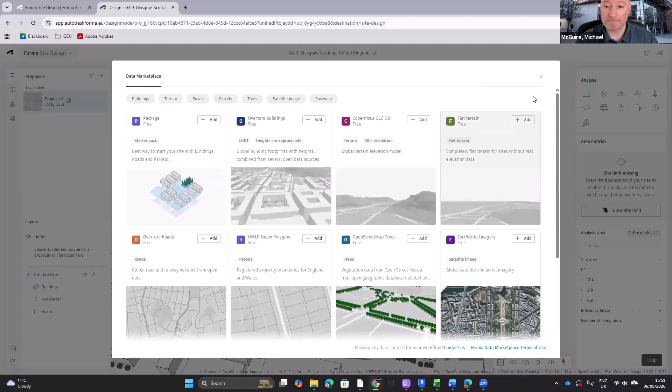So each of these little orders or libraries, once you're done—so again, it was the starter package, which gives us the buildings and the roads, and then the terrain and the trees. We can close this and we'll see what it's building for us.

Okay, so I know this area in Glasgow pretty well, and I would like to actually develop this site. Now, the last time we did some training on this, somebody asked, can you use a site that already has some buildings on it? Maybe you want to remove them and propose something else? Absolutely. But remember, we're telling you what you're going to propose—the type of building, what it is, the spaces, etc.

So here's a nice vacant plot. I could use this, or I want to use this plot that's here. So let's say I want to use this plot—this one has nothing on it, and I could just start with the site straight away.

For this one, if I double click on the building, do you see I get a purple boundary to my screen? I can select the building that I don't want and hit the delete key on my keyboard. And I'll do the same with each of these little buildings, just selecting it and then clicking delete.

And all the buildings that were sitting on that site have now gone. When I'm done, I'll click done. So ideally, I would like to define my site here. In the tools, as we look along here in the little shortcut bar, we have the site limit tool.

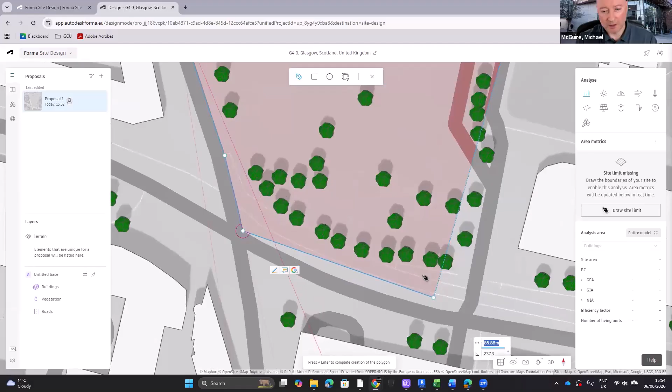Here, for example, if I were to snap here, it's going to miss out a lot of the site, so let's pick up most of that. There we go, a good example of that, exactly there. And then just zoom in more if you need it to be exactly to this site. For the purposes of this exercise, we just need it to be approximately anyway—it doesn't need to be exact.

But I'll trace around the road that's there. And I mentioned this earlier when we drew walls in Revit, but if you click back on the start point again when you're doing the site, it will finish and define your site that's there.

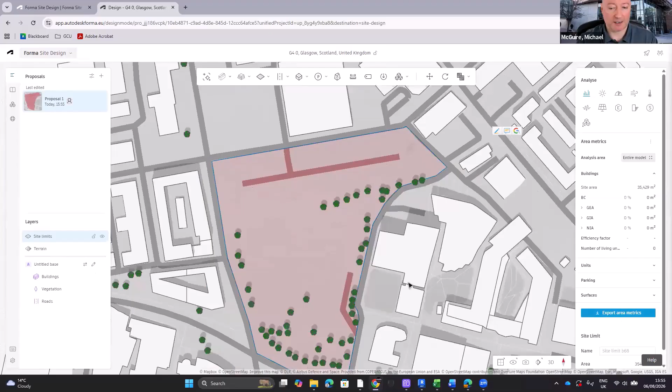So we can go back down here, and instead of 2D, we can switch to the 3D mode, and we can see the site and how it sits in context with all of the other buildings.

Here on the left, we now have a proposal 1. What we might want to do is click the 3 little dots and say duplicate. And then the 3 little dots and maybe rename that proposal 1-1 or 1.1 or something. What we want to do is this is proposal 1, then this is maybe a tweak of that.

Maybe each concept you want to change, maybe it's the same building. So if we go back to this, it's the same building with minor changes. That's up to you if you want to call that concept 2. So proposal 1, proposal 2, proposal 3, and so on.

What we also want to see, something that the judges will want to see, is before you start to build on the site, an analysis of each of the main analysis types. So let's look at what your site capabilities are at this point.

So if we click things like sun hours analysis, you can analyze the entire model. There we go, so we'll run that. You can also go in and select that instead of the entire model, it's the site limit. So be aware, sometimes you will want to choose between the entire model that you have, and sometimes you want to analyze just the actual site itself.

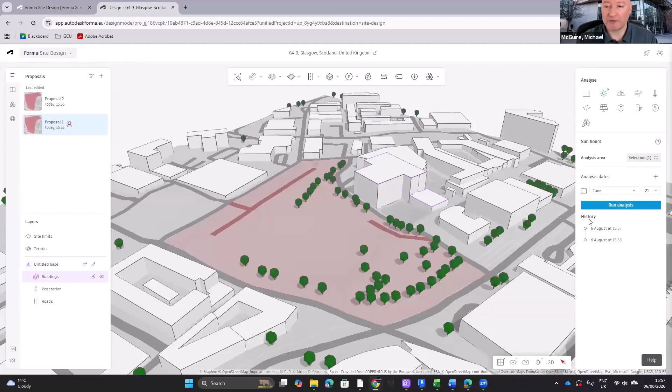You'll see when we want to generate things like photovoltaic energy, for example. So if we go in and we look at the analysis of what that looks like, the amount of sun hours that we have on the site, let's say, there is an inspect button. And if I click on various parts of the site, we're getting approximately the same number of sun hours, but some areas might get less because of buildings putting them in the shade, etc.

So if we look at the little inspect tool, it might be good to lead with this or start with this. A couple of things to draw your attention to: if you're going to screen print this to put it into a poster or PowerPoint, however you're going to submit this, make sure that the numbers are quite clear, but make sure any of the settings or the values are also clear. We'll see that when we look at some of the other analysis as well.

So let's look at sun hours. With this one we have the entire model. The numbers will be the same around the site, but look at what it's showing in terms of the other buildings. There's not a lot of sun here, there's more here because of this building. So how might this building impact your building? Well, it will if you position your building over here - there's 6 hours sun versus 16 hours sun.

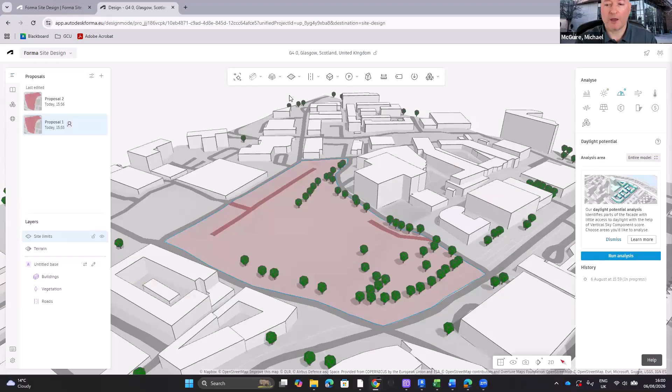Daylight potential - let's run with the entire model. We'll run the analysis. Sun hours analysis is direct sunlight versus daylight potential. Daylight potential is, think internal space - how much of the internal space is likely to benefit from daylight. The higher numbers might be better, maybe because I don't want to use artificial light, I don't want to use electricity to light the interior.

We have the inspect tool again. Currently I'm seeing the buildings that exist, and we can see big differences in the scores. So daylight potential might be another one we look at for the surrounding buildings and your site that's there.

And then wind analysis - there are 2 types. There is this one, rapid wind analysis, and what we can see from our site area. This is generated very, very quickly. It's based on the layout of all the existing buildings, but it's also based on the local weather data, so this should be quite accurate.

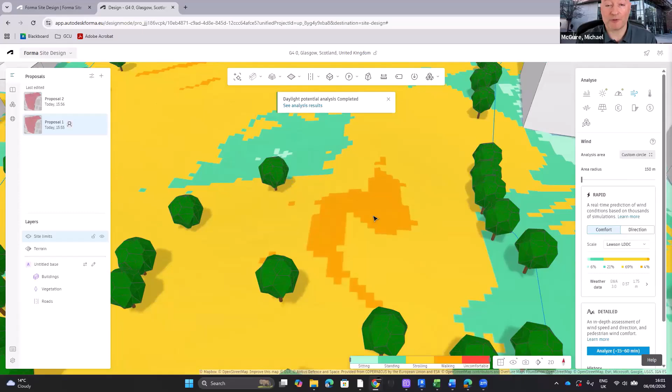We have those really light green areas here - if we look at the legend we'll match that up, that's comfortable to sit in this area. The other slightly teal or darker green is comfortable for standing in that area, and then we've got some others more comfortable for walking. So it's a little bit windy to sit here - maybe you don't want this as a seated area, and maybe you don't want this as the reception, because walking in and out of the building you might find it's actually quite windy here.

Once you've got your concepts, you can generate a detailed analysis. It says here it's going to take between 15 and 60 minutes, but it will give you a much more detailed analysis. You don't want to do that for every concept, it might take too long. Once you start to put a building in here, you might want to do that with your final concept, or that might be how you choose between your 2 final concepts.

If you have concept 4 and concept 5, and they're very similar, run a detailed wind analysis and check what the difference is. Maybe that's going to be the overall method that separates them both.

This should influence your design - why would you put the building here? Possibly you want more natural ventilation. If we think about this area where it's slightly windier - generally throughout the year, remember we can look at specific dates and specific times, but generally this is the windiest area - maybe you want a naturally wind-driven ventilation building, so that's why you would choose here. Again, you just have to tell the judges, tell the jury that's why you're selecting that space.

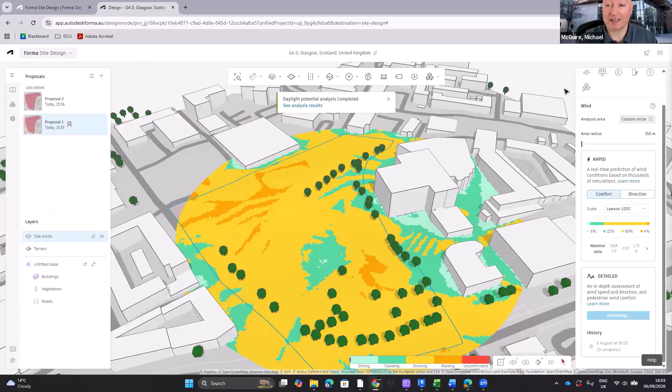We can also look at noise analysis. If I run a noise analysis at this point, we're not getting anything because I haven't populated the roads. We can look at all of the site. When we imported these roads, you can click on these lines and then edit here and add in the details - how many miles per hour, what's the speed limit on that road, and what's the average daily traffic.

You can get these numbers a lot of the time from government websites if you Google the town. So let's say 10,000 is the average daily traffic.

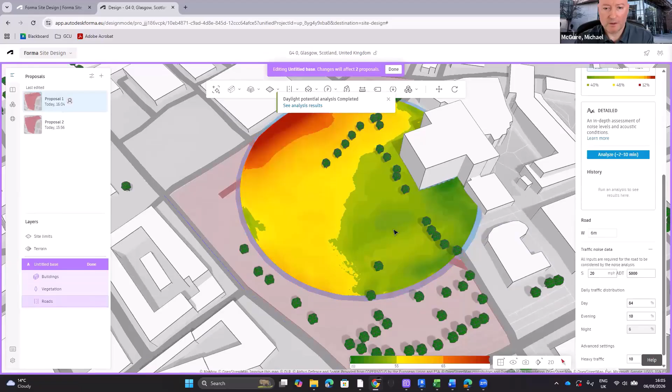So immediately I'm recognizing that this area here, although it was given a lot of shade from this building, this area here is a really comfortable area, maybe because it's quieter and it's less windy, for example.

So before I've done anything, I'm going to take each of the analyses and screen print the results. That's going to be at the start of the poster, and then we can start to show the various designs and the concepts that we draw.

Let's try and put our concept maybe here in the proposal, and then maybe I'll try and put it somewhere else. Over here it's a little bit noisier, but maybe in my design I'll spin the rooms around like this, so maybe this would be the north and the south.

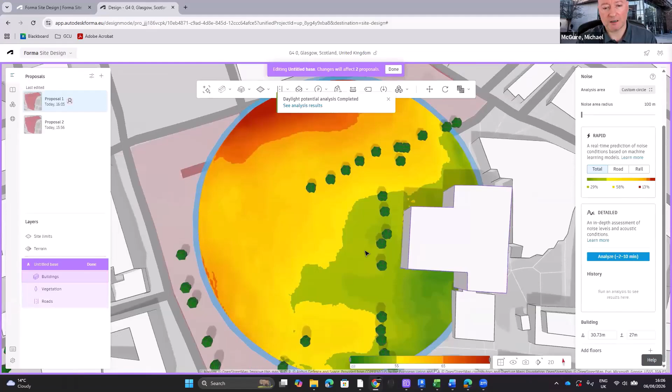At this side, which is the noisy side, maybe we put some of the rooms like staircases, bathrooms, the storage areas on this side because it's the noisy side. And then this side, facing towards the east, is the quiet side. It also should get a lot of light as well.

So once we're done editing, we can say done. There we go. And we can start to model the concept.

Now there's two ways to do this. You can again go back to a directly north bird's eye view if you want, but I'm just going to sketch, so it's okay as it is.

If you want a building that's exactly north-south, that's going to sit at the same angle as some other buildings, you're welcome to go and try and recreate it in plan view. I'm not going to do it in plan view because I want to show you how the tools work.

So we have multiple ways of drawing buildings. If we had managed, in Revit, to create something of just a big cube, a cuboid, it would be super simple. We could draw something using the line building tool.

And to use the line building tool, we can set up what the width needs to be, how many stories there are. So we say there's 3 stories, 4 meters in between the stories, and something like 6, 12, 14, maybe 18 meters wide.

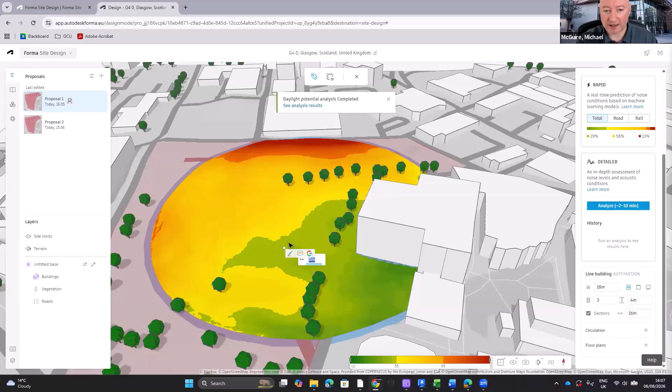And you basically just click and then you can start to draw in your concept, however you want that building on this site. Now I'm going to suggest, let's say we created a building that was 18 by 60 meters.

So I'll click again. So we have this building. This could be concept 1, and I'll run all the analysis on this. That could be concept 1.

You might want to do another concept of exactly the same building sitting somewhere else on the site. So you wouldn't put them both into one concept, you would have proposal 1, proposal 2. And then if we carry on, you could have another concept and put it somewhere else and so on.

Do you see what's starting to happen behind the building? It was providing a buffer to the noise.

So maybe what we want to look at might be a line building. Instead of 18 meters wide, maybe we want something narrower that we can model around.

Do you see, like a berm, a sound-deadening feature? What that's doing is helping with the wind and helping with the noise. We can see that in real time as we draw it in or take it away.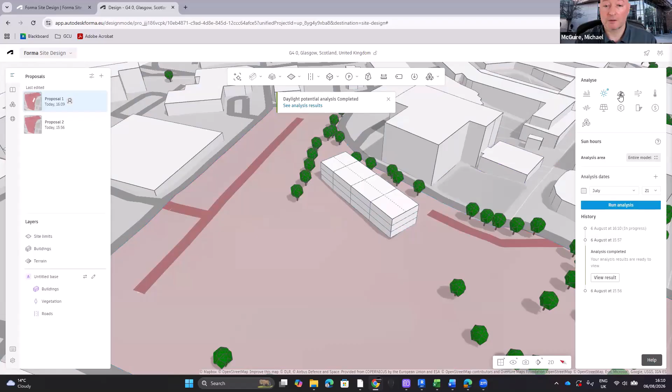Once the analysis is done, you can view the results. So I'll do daylight again, entire model, run the analysis. Wind—we can look at the wind analysis, it's just a quick one. We have a little bit of a windy area here, creating something like a little wind tunnel, you see? So maybe not good for reception.

Whereas here might be really good to position a reception with some benches outside. So you see how I'm already thinking of how I might change my concept, right? Look at this area—there's lots and lots of comfortable sitting area. So sitting, maybe some outside dining, if we want to look at outside spaces, or the reception could be here.

And then what does the noise look like? Yeah, it's not super noisy, maybe up here. Have a look at what rooms are in the plan. So currently we were saying that area had an office, a print room, and a server. It might not be the best—could we move the office, the print room, and the server? The print room and server are here because that's the noisiest part of the building.

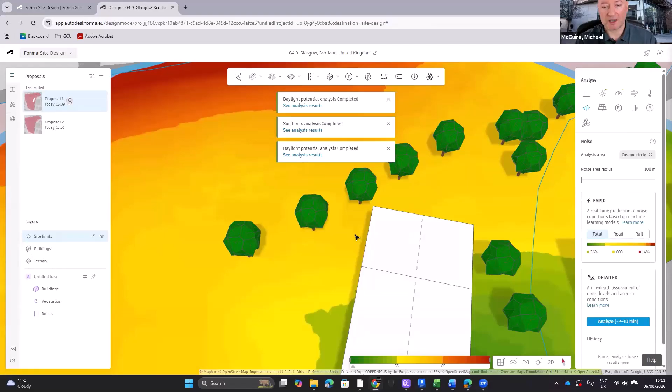Okay, and then when we get to the solar energy analysis, we don't want the entire model—we only want our site, only our building, and you'll see why. We can do both, but we'll see why when we look at the analysis. So we have a sun hours analysis now complete—yep, we can inspect that. Again, I mentioned this earlier, but if you have a really warm, sunny climate, overheating is a problem, then you can use this as an example of how you're dealing with it.

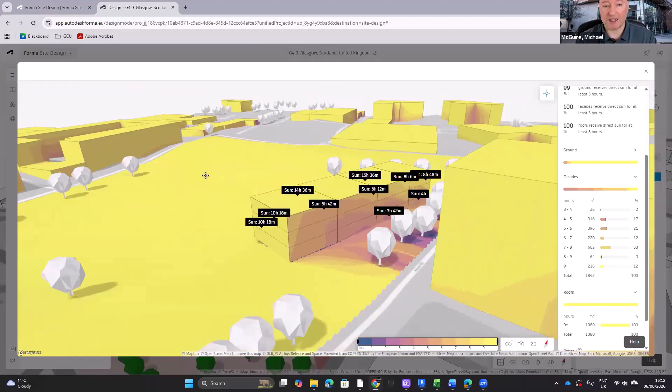When you take that screen print, notice here we have some numbers—things like number of sun hours. We've got 216 that receive 9 plus. You want to get less than that. So how do you change the shape to get less than that? Or you want more than that—if you're in Scotland, you want much more. So how do you get more? Well, if I want more, I'll move it to this area, or I'll rotate the building so that it's east to west.

Okay, so you will screenshot these and record these. And then if we look at daylight potential, it's the same, it's the full model—but again, anytime you want to screenshot, please use the inspect tool. This is given as the quality of the light, and here you get a score. So we've got 10 to 15, and it gives you a percentage—you've got lots and lots of really good daylight. Can we improve that? How would we improve that? Okay, maybe moving it or rotating it.

Wind, we did look at. Noise, we looked at. Solar energy analysis—so this one's an important one, right, another important one. We can use the inspect tool by choosing only my building. Do you all notice none of the other buildings have been highlighted orange? I can work out exactly the kilowatt hours per square meter, but the total solar energy that I can create is 945,000 kilowatt hours.

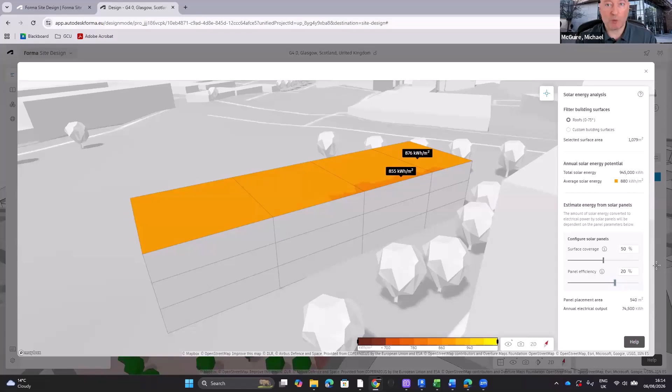You can tell the surface coverage—80% of the roof, or 50% of the roof, is covered with solar panels. The panels are maybe 20% efficient, whatever it might be. You see all of these results—the judges will want to see these results. So make sure when you do any analysis, you keep these results clear, and screen print everything into the poster.

Okay, and then if I look at proposal 2 and I want to draw exactly the same building, I'm going to draw that same building. Oh, it's not 18 meters—let's try that again. Plain building, but 18 meters, 3 stories, 4 meters. And we'll draw it here, we'll say it was 60 meters, and we'll put it here. So there's the same building for proposal 2.

So if I now run the analysis on the entire model, pick that date, and the daylight is entire model, and the wind—let's have a look at the wind analysis. What does it look like? Really good here on the south, lots of light, little shade, but also not a lot of wind. Ignoring the geography and topography at this point—we can fix that—we've got the wind.

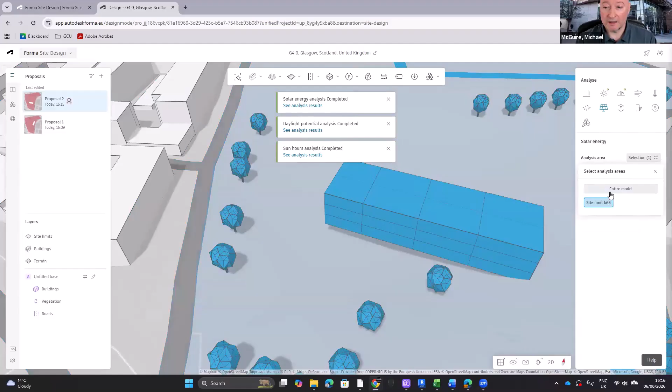Noise, what does the noise look like? Remember this road out here? Yeah, it's good—it's not uncomfortably loud from that noise area. That's fine. And then the solar energy—not entire model. So always with the photovoltaic analysis, we don't want the entire model, otherwise we get all the electricity from every roof in Glasgow, right? We don't want that—we want to show it's only for this building.

So sun hours analysis, that was the last one. Yep, let's go in and see if we can find it then.

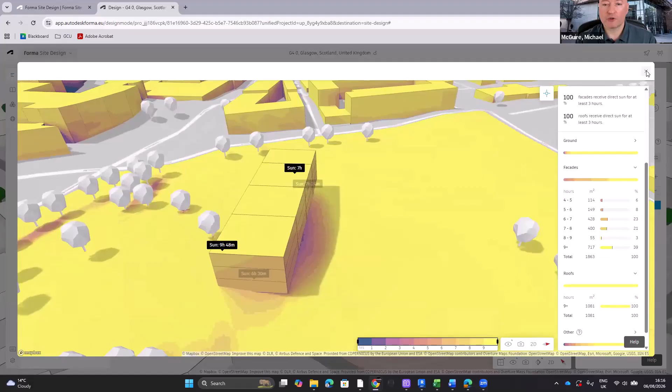So here's the difference. Now we get to check by putting the building in this orientation, we can look at the sun hours analysis and the scores that we get. So is that better or worse? It depends if you're trying to get more sunlight into the building, or are you trying to block the sun with proposal 2 and proposal 1.

The interpretation of it is up to you, but you have to communicate that to the judges in some way, that you're trying to reduce the amount of light going into the building, for example. So much, much better natural light in this concept. Much better natural light. And again, we can look at that, and the way you prove it is with these scores, so screenshotting these scores. I'm going to move that over so we can see it.

Okay, and then how's the solar energy analysis? What was the number that we got from the last time? We're comparing the two concepts. So if we look at concept 1, proposal 1 and proposal 2, which of the two is a better concept? That's up to you to explain which one is the better concept. And then we could look at, so we duplicate that to proposal 3.

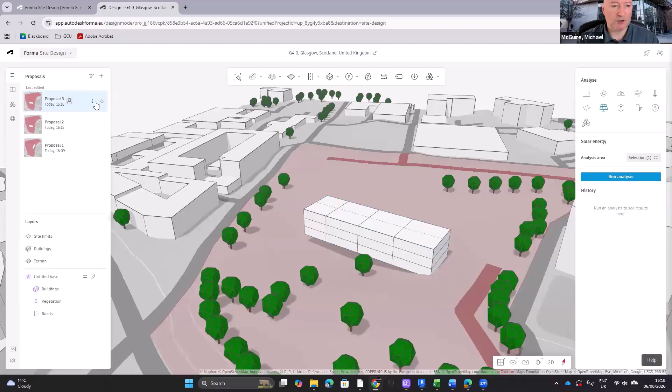Let's look at the actual building that we created, it's a bit different. So we want to create this building this time. So the tools are not the line building, this time we want to use the basic building tools. Basic building. And then what I want to do is think, where was the best place?

Where was the best place on this site and how did that sit? I'm going to say it's maybe here, sitting in this angle here. Okay, so it was 35, 500, 35 and a half. There we go. So we'll say 35 and a half that way.

Yeah, let's think. Do we want it to go north-south? Do we want to go east-west? I'm going to try somewhere in between. I'm going to try and sit it at an angle on the site. So then it was 10 meters.

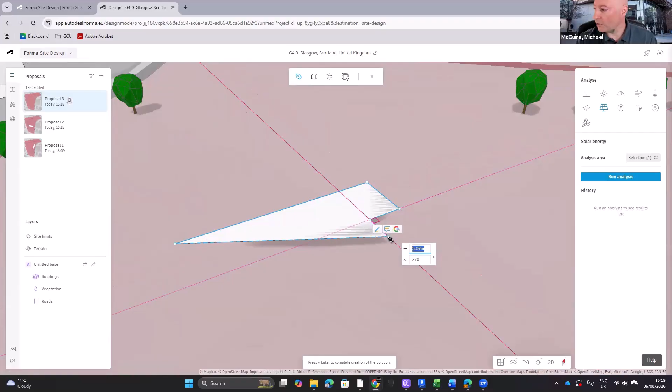You'll notice when you draw, you get a perpendicular sign happening. And then after the 10 meters, it was, let's think, what was it? Oh, I haven't got that size. 3, 6, 7, 8, 9 or so meters. And then it was, we're coming back out again, 3.

And then we follow that perpendicular down, until it snaps, and then we go back to point 1. So the reason I'm drawing this in 3D is to let you see the next step. How many stories did we have? So we had 3 stories, but I'm drawing the ground floor, which was just the 1 story.

Okay, so just the 1 story, the ground floor. It was 4 meters high. So I'm going to change that in here. And now we've got the ground floor. I want to draw on top of that using the same tool, so basic building. I want to draw on top of it. We can draw in the next floor level.

Okay, so let's say it was 25 meters. It might come all the way across. So we'll just guess, and it's 1 story. And it was 4 meters again. And then the final level onto that was, let's say it came all the way along here, but it was only maybe halfway along or something. There we go, so it looked something like that. But again, 4 meters. So there's roughly our concept that we created in Revit that looks something like that, right?

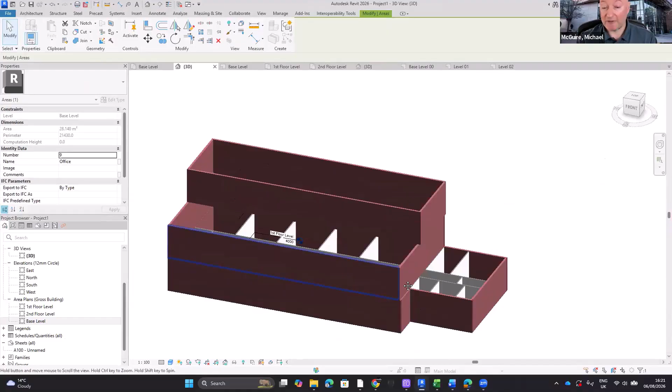So something like that anyway. If I'd taken my dimensions, I would recreate exactly what it looks like. So we have the Forma model. This is proposal 3. And I'm going to run all the analysis again on this model and then compare them to proposal 1 and 2.

And what I might want to do is recreate this model, this proposal over here, that's proposal 4. And maybe it sits up here in this angle as proposal 5, or over here is proposal 6, and compare each time what the different analysis results are.

Okay, so we'll keep it the same date. Entire model, run analysis. Daylight potential, entire model, run analysis. Wind, what does the wind look like? Remember, this is our reception.

Yep, that's pretty good for the reception. It's not very windy. Does everybody notice what's happened here? This has created a very sheltered area. This would be a lovely place for eating, resting, picnic tables, or just waiting areas on the outside.

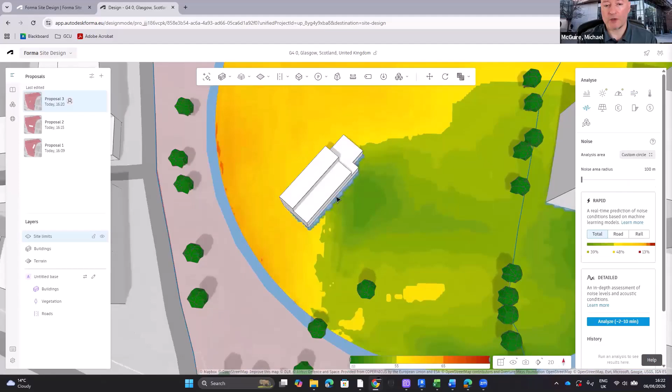Noise, what's it like for noise? Yep, it could be located better, right? Maybe it could locate better over here. But do you see how this analysis has changed my perception of that?

So if I take a screen print of this as concept 3 and rebuild it sitting here, this is why earlier I spoke about concept 3.1 and concept 3.2. Concept 3 is maybe all the shapes in the building. It looks like this, just in different places. But I'm going to communicate to the judges that I'm reading this, understanding it, and acting on it by putting the building in a more sheltered area. So there's much less noise over here.

Okay? And then what happens with, I did the entire model. So we're going to see what happens with the entire model, but let's do selection only and run the analysis for photovoltaic. We don't want to include all of the solar panels for all of the roofs in Glasgow, okay? You would get a fantastic result.

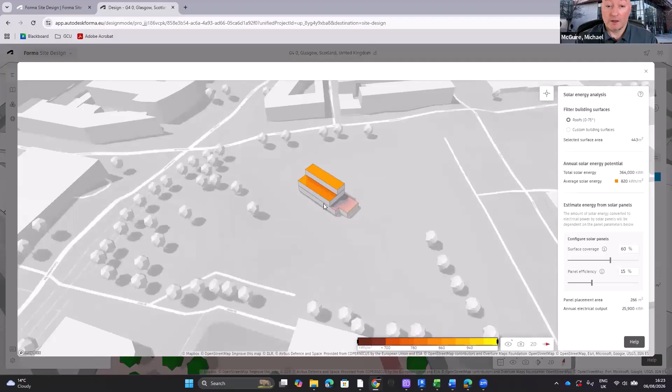You would get a lot of electricity. But we want to compare building only, so we will look at that. There we go. Does anybody notice any issues? This is good, this is good. This is less good, and this is really not good.

Okay, how might you improve that? You might improve that by rotating the building. So when we try again and do this building maybe here, I might be tempted to try it rotated. Okay, so do another concept, but actually rotate the building so that it sits in this axis. Okay, and do it here. So that's proposal 4, right? We could do that, and then compare the analysis.

But at every point, just so you're aware, when I view the results, I want to zoom in. I want to give the judges a really good view of that. And we want to inspect across all the different regions and areas and make sure the judges can see that you've set it up to whatever you're told to set it up to. So if it's 80% coverage, 50% coverage, 18 or 20% panel efficiency, you set it up as you're required to, but show them this.

25,900 kilowatt hours, okay, the total solar energy over the year, 364,000 kilowatt hours. So show the judges what you've made. So what's that number? 364 versus... oh, wrong one. A direct comparison, 962. Yes, so that brings a lot more, right?

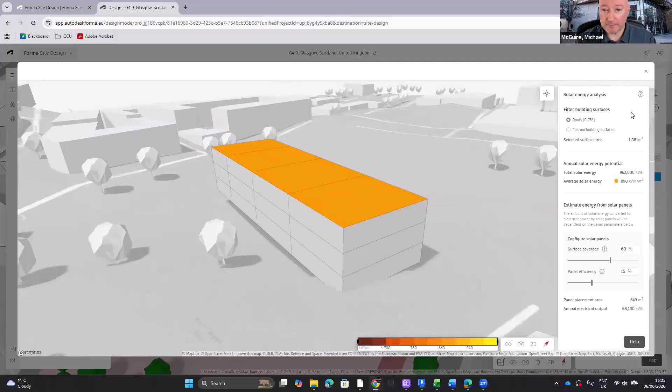But does it also work with noise? Does it also work as well with sun hours analysis? You will struggle to find a building design on the site that is the best for sun hours, wind, photovoltaic, and noise all at once. You will find one is better than the other. It's up to you which you take forward as being the best proposal and why it's the best, okay? But always make sure every time you are screen printing, we, the judges, can see all of the results that are here. So if you use the inspect tool, even if it's multiple angles, show whatever it is you need to show, and make sure we can see all of these results.

Okay, and that brings it to a conclusion. So does anybody have any questions?

There is an additional question in there, Michael, from earlier. It's regarding Twinmotion.

Twinmotion is not mandatory. Teams can use Twinmotion and other visualization tools, you're welcome to do that. Obviously, the judges will be looking at things like which spaces have you put on the ground floor and why, which spaces are next to each other and why, and then your presentation of that building. So if you create it in Revit and render it in Twinmotion, maybe there's more points for aesthetics of your presentation, absolutely, versus if you don't do that. It's not that you have to, but it depends on what the judging criteria is.